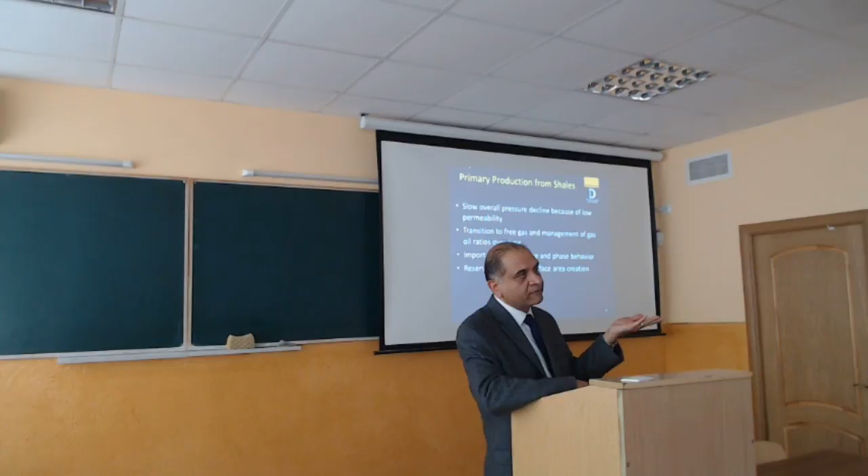So it's a slow overall pressure decline because of low permeability. And as soon as you go below the bubble point, you are transitioning to free gas, and that free gas competes basically for pore space and production. So it's important for us to understand that reservoir access and surface area creation in low permeability systems also contribute to this phenomenon.

So here is a graphic of a classic gas oil ratio plot for a conventional reservoir. What you see here is constant gas oil ratio in the first phase when the oil is above its bubble point. Once the oil goes below bubble point, free gas is generated, but your gas oil ratio goes down. That's because you have not hit your critical gas oil saturation yet. Until you hit critical gas saturation, your gas oil ratio is going to go down, and then it increases.

This increase from initial gas oil ratio to this peak can be of the order of 20 times, 10 times. So you might be starting at 1,000 SCF per STB of initial gas oil ratio, and you would hit a peak ratio of 20,000 SCF per STB. It's very common in conventional reservoirs.

Okay, so now please keep that in mind as we look at the behavior of unconventional plays. The conventional system, though, that is for a vertical well. Vertical well draining radially, right?

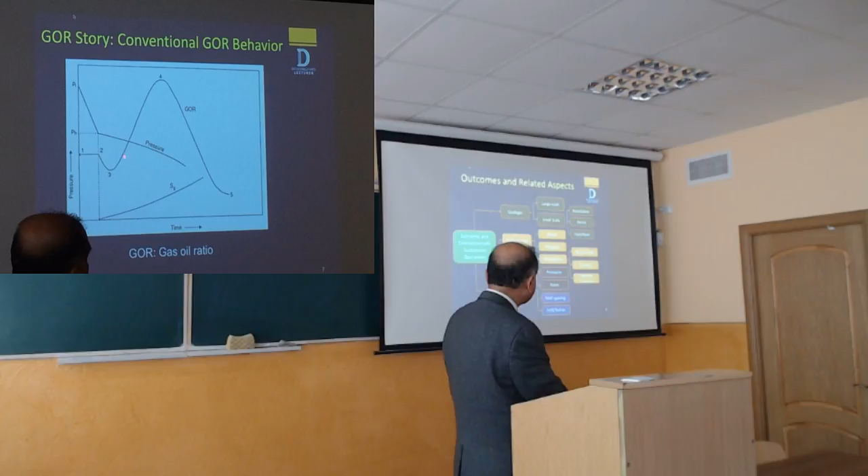And the things that are important are geologic. You have to think about completion because of horizontal wells and hydraulic fracturing. How do you operate these wells? That's an important question. And then eventually, how should a well be spaced?

Whether they should be spaced 40 acres apart, 80 acres apart, and so on - all of these considerations are important.

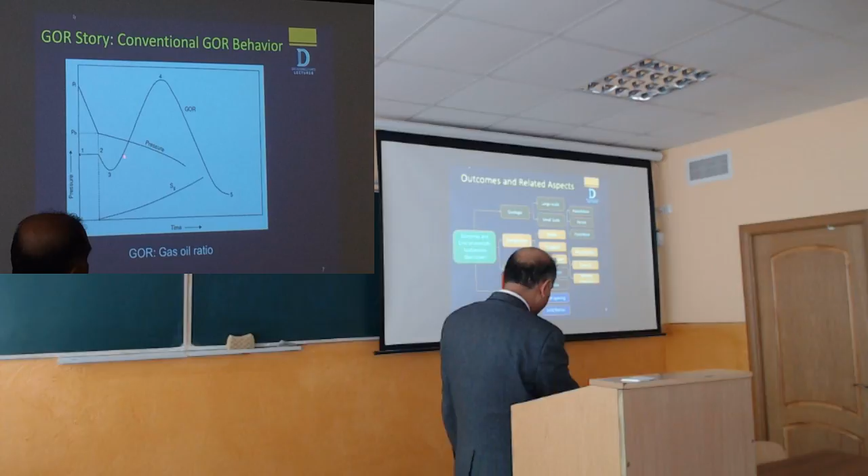Okay, so let's now look at the snapshot. Some of the hottest places are Eagle Ford and Bakken. So what we see here are cumulative oil plotted against cumulative gas oil ratio. One thing that becomes clear is that as the amount of oil each well is producing increases, the gas oil ratio decreases. So the lower the gas oil ratio, the better the well in general.

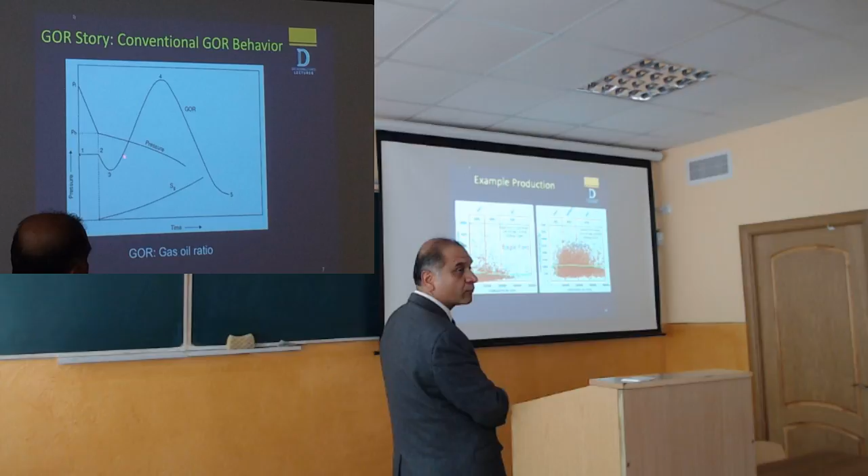Okay, there are a lot of wells that are poor wells. In fact, there are more poor wells, meaning wells producing less than 100,000 barrels of oil. Lots of wells producing less than 100,000 barrels of oil. They have very high gas oil ratios. These are very high gas oil ratios here also.

But in Bakken, there are a lot of really good wells, over 100,000 to 200,000 barrels, with gas oil ratios that are very low, only of the order of a couple thousand standard SCF per STB. So these are the two best places producing liquids in the United States.

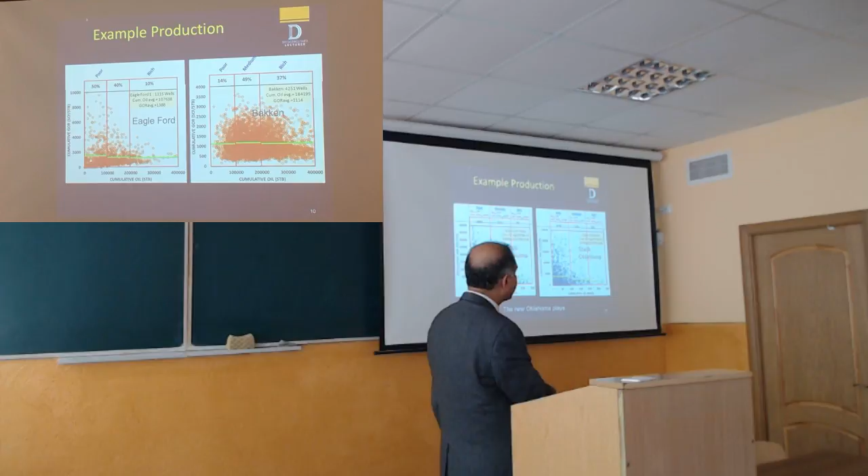Then we look at some of the really recent ones. These are brand new plays that are only 2 to 3 years old: Scoop in Oklahoma and Stack in Oklahoma. Again, producing liquids, but even within 3 to 4 years, there are quite a few wells that have produced over 200,000 barrels of oil.

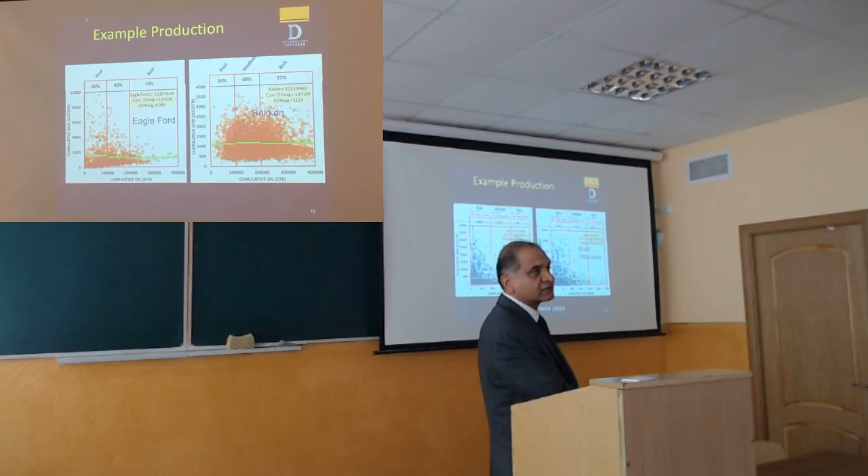So some of these newer ones, they are drilling one horizontal well, and it's not uncommon to see initial oil production of over 5,000 barrels per day. So these are coming on, but again you see the same trend - a lot of wells producing very high gas oil ratios.

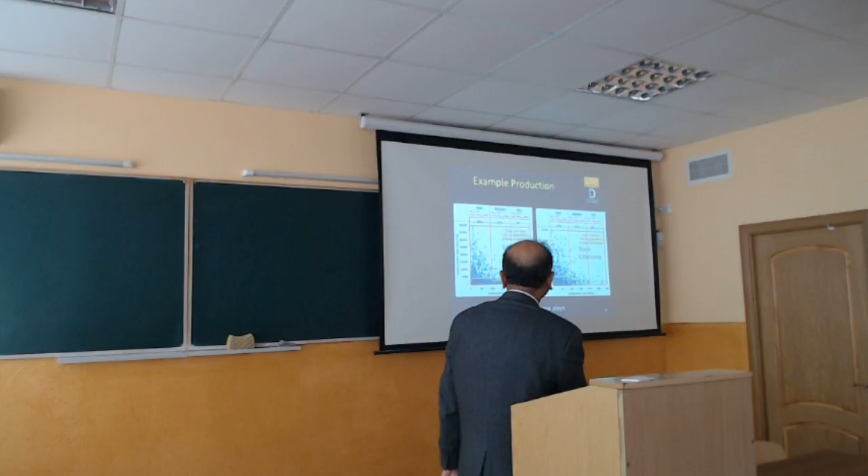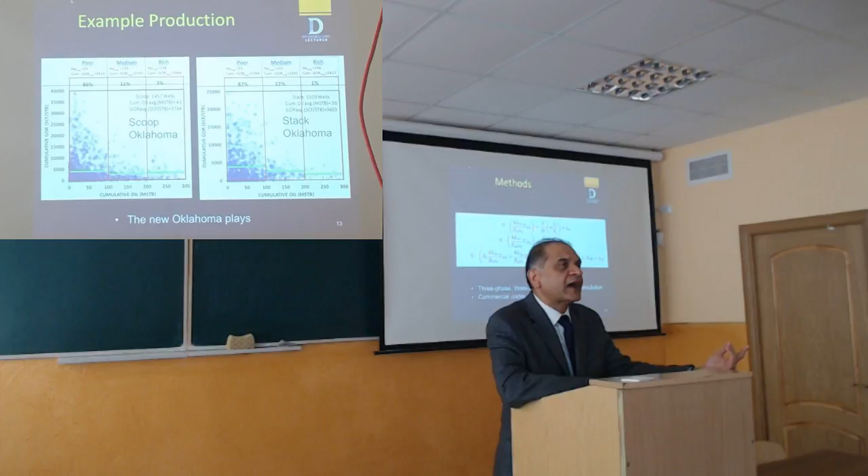Okay, so the methods we use for understanding how production works is by looking at reservoir simulation. We do a lot of reservoir simulation, either using Eclipse or, in this particular case, CMG IMEX, the black oil simulator from CMG, for looking at some of these trends.

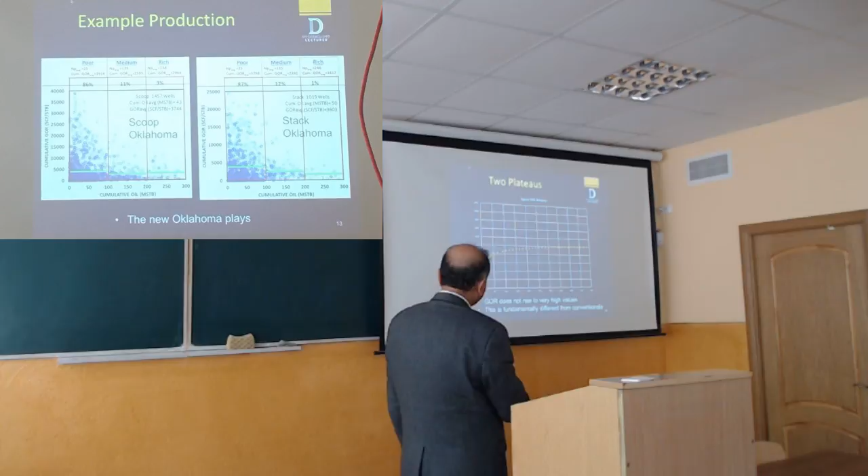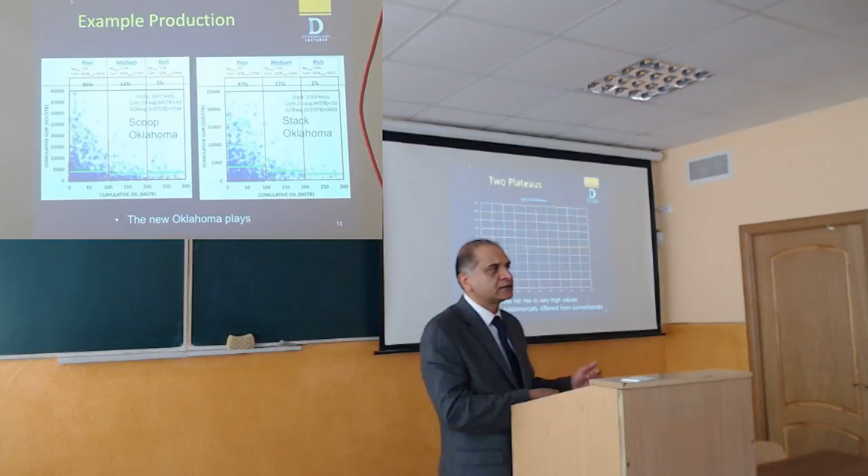So when we do that, this is for a typical unconventional well - we see two plateaus. This first plateau we call a transient plateau. Remember the system I described: it is not a radial system. It is basically a horizontal well with a fracture, hopefully a vertical fracture.

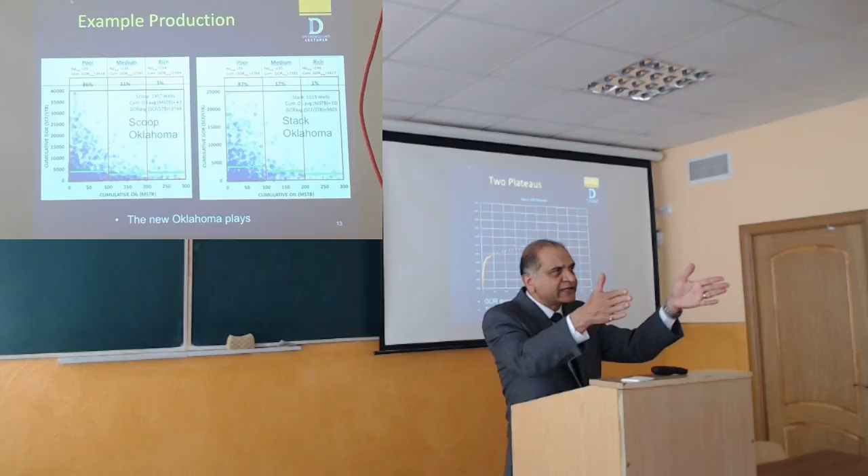So you are essentially creating these compartments, and you are draining the compartment linearly - oil is being drained linearly like this. So this particular segment we call linear flow. Then it hits a plateau when it hits the boundary of the reservoir. This boundary sometimes takes, in this particular case, only 50 days, but depending on the permeability of the reservoir, it can take up to 6 months or a year.

It can take very long because of low permeability. But then it does not show the behavior of conventional. You see another plateau which is only about 1.5 to 2 times your initial gas oil ratio. So it's very different from the conventional behavior. GOR does not rise to very high values, and this is fundamentally different from conventionals.

Okay, so that was simulation, right? That was simulation, and this is field data, from a paper by Jones. This is the paper number, and well after well after well behave like this.

You have, so you're reducing your producing bottom hole pressure like so. So why do you reduce bottom hole pressure as time increases? We do that because we have to keep the rates up, right? Because the drawdown determines the rates. So we can start high because the initial reservoir pressure is high, but then we reduce the pressure to increase rates.

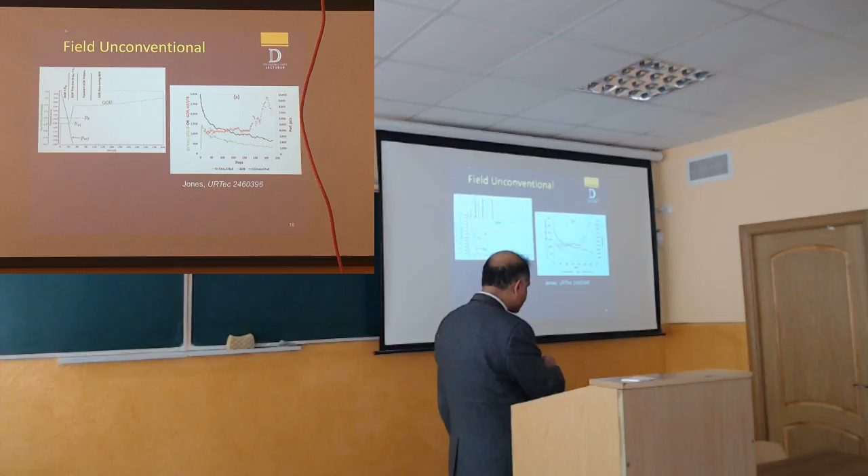So remember the system that I showed you. What is happening is that you have so much area, and you're drilling literally tens of wells in that area. You are assuming that there is no communication between these compartments. And gas is very mobile. If there is any communication, then the gas is going to move around and gather somewhere else. And supposing you drill into that section, then this is what happens. Your gas oil ratios right from the beginning can go to 20,000 SCF per STB.

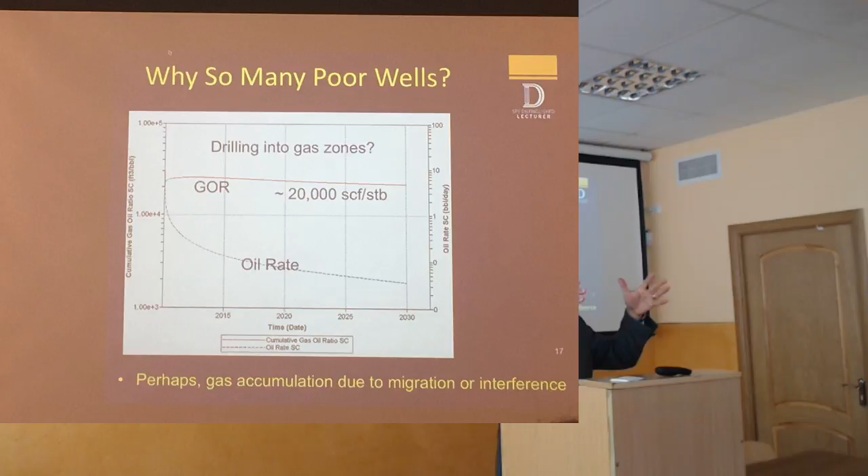So this is just a hypothesis based on all of the behavior that we are seeing. If you have some really poor wells, it could be that you might be fracturing into a gas-rich zone, and that might be giving you the high GORs and very poor well performance, because a low permeability, undersaturated reservoir is not supposed to behave that way. But a lot of wells behave this way. In fact, out of 10 wells that are drilled, 9 behave that way, and then 1 well behaves like a blockbuster well.

What happens at the last period of production? Rates rapidly go down, or not so rapidly, at the last period of production. The decline rates again depend on well to well.

In wells where you have very high gas production, the decline rates are really steep. You start off at a reasonable rate, but then within a couple months, your gas oil ratios are so high that your wells become uneconomical. So the decline rates are very high. And the wells that do really well are somehow able to sustain the rate.

There is some evidence, by the way, of communication between wells in other ways. What happens is you're fracturing one well, and then you go ahead and fracture a neighboring well. The water from that well ends up in this other well that you fractured previously. So that means there can be communication between wells that are even sometimes 1 mile apart. And if you're drilling 4 or 8 wells in a 1 mile section, then there is at least a possibility that you're creating essentially one big pool that you're drawing from.

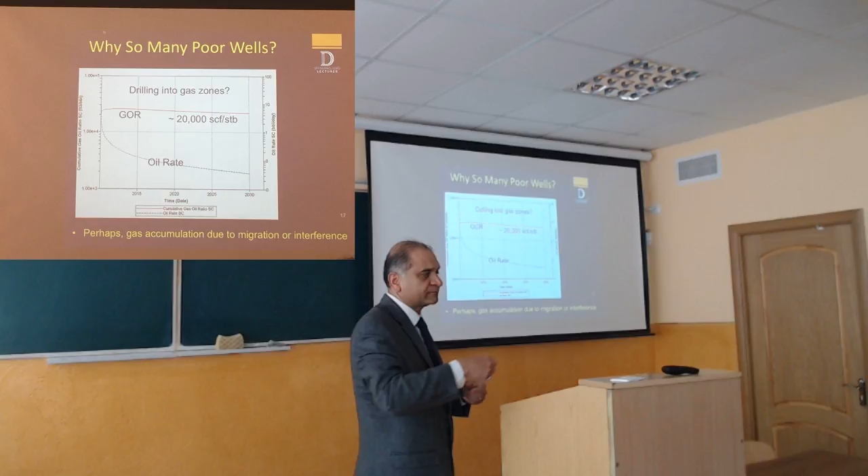So this is one story. I hope that you can take that home with you. Okay, this is one story.

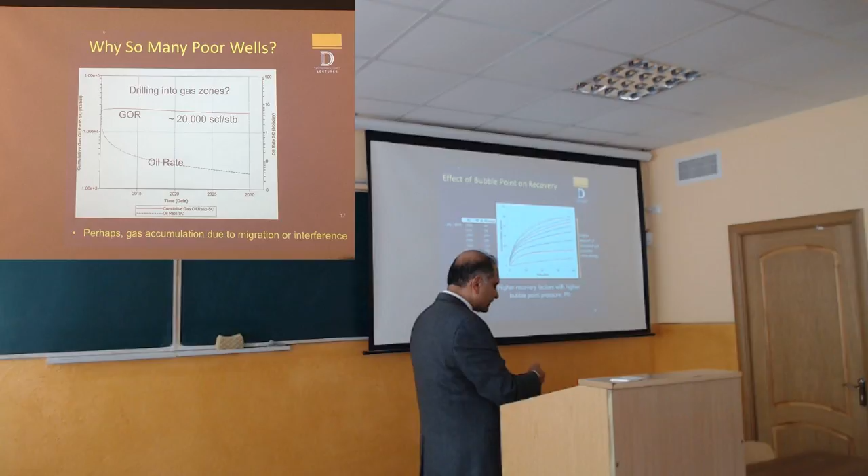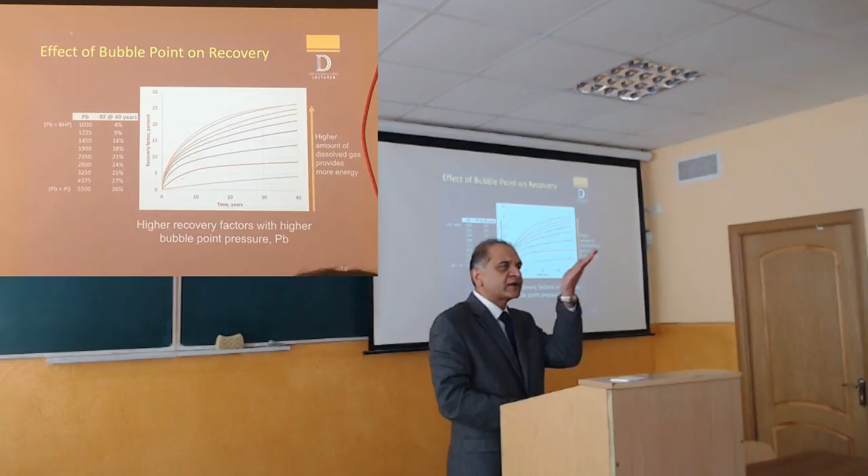So if you look at, we did a lot of sensitivities, and I'm not going to show you a lot of that information, but this is just one plot that shows the impact of bubble points. As the bubble points increase and go more towards the initial reservoir pressure, here the initial reservoir pressure is 5500 psi, your producing bottom hole pressure is 1000 psi. In general, you're increasing reservoir energy, and because this is primary production governed by initial gas oil ratios, your recovery also increases in an ideal sense. This is not field data, this is simulation.

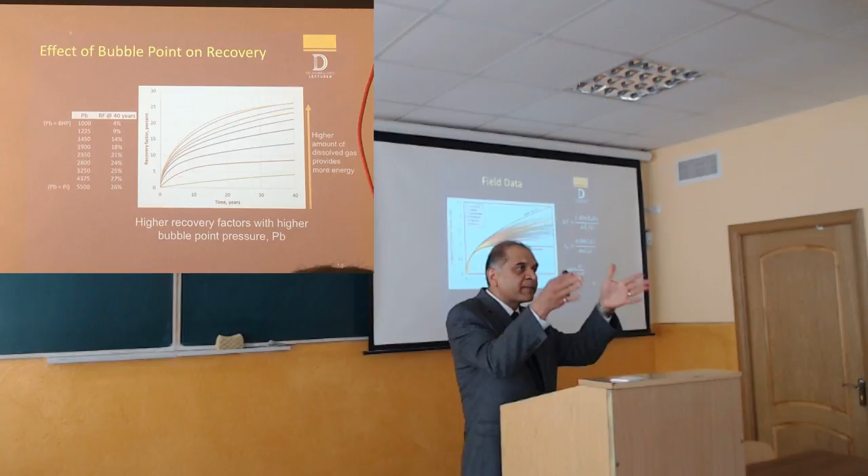But then if you take all of the wells that I showed you, all 15,000 of them, and put them on one plot, this is what you end up with. You end up with a plot that looks like a very similar fan that I showed you. It shows essentially, and this behavior we can understand by assigning basically a compartment, that a finite reservoir producing liquid would max out here, but because of the presence of gas, you have this additional increase in recovery rate. These are what we call adjusted recovery factors, the definition is given here, where you have the recovery factor. This recovery factor is a common definition for dimensionless analysis.

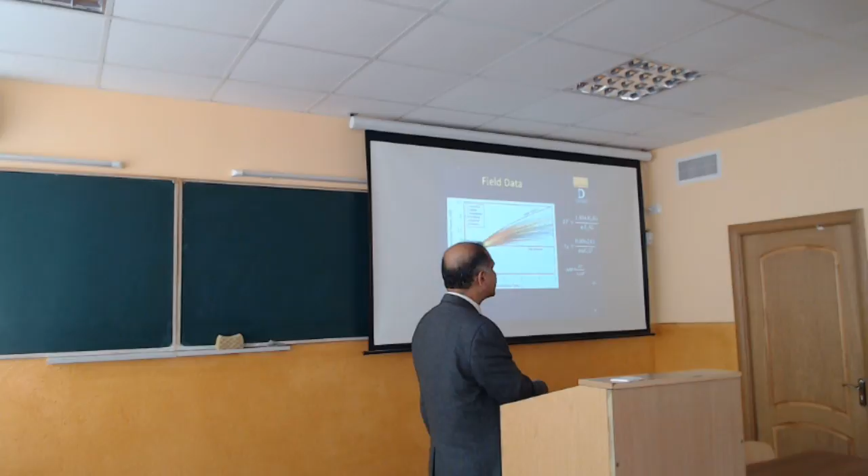This adjusted recovery factor also has drawdown in it. And we can basically show that all of the wells can be normalized by putting them on a plot like this to understand how the reservoir mechanics are working. And if you do that, we can then start looking at the various parameters that can influence production.

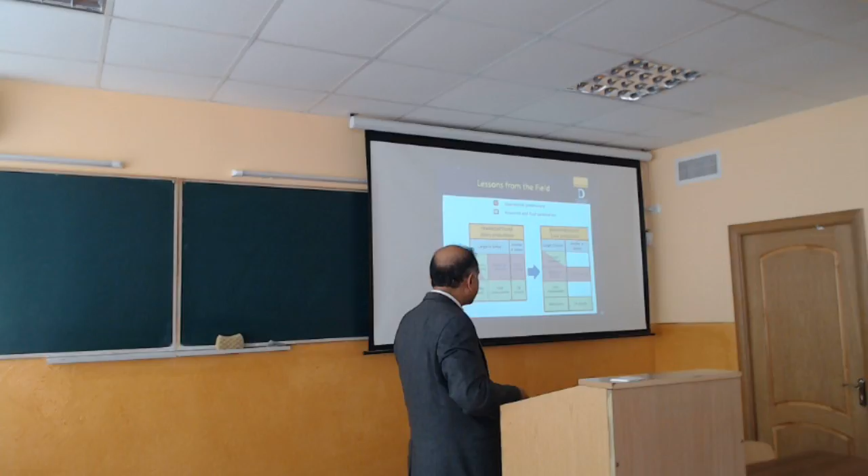So this is kind of a busy table, but you have two types of parameters here. You have operational parameters and reservoir parameters. By reservoir parameters, I mean something like permeability, viscosity, compressibility, and so on. Operational parameters are number of fractures, which you can control to a certain extent. You can control operational pressure, bottom hole pressure you can control, and fracture spacing you can control.

So basically what the plot I showed you helps us understand is that in the earlier portion of the system, where all of the wells are in linear flow, we have pressure drawdown, which is both a reservoir parameter and an operational parameter. Larger is better. Number of fractures, of course, the larger the better. Fracture spacing, smaller the better, and so on. So we can look at those types of influences. And obviously oil viscosity, the lower the better, because as more gas is dissolving in the system, the oil viscosity is lower, and that helps increase your production.

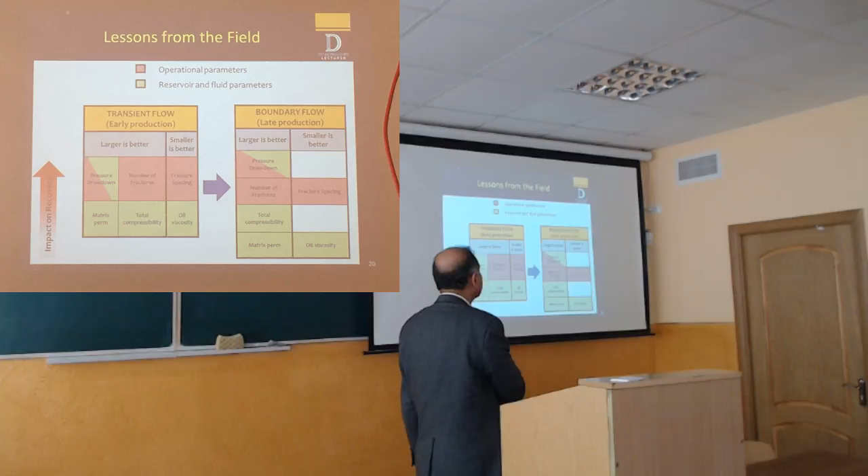And so we can do the same type of analysis for boundary flow as well. One of the things you do see here is that matrix permeability, which is the number 2 factor here, goes down in importance as you switch from transient flow to boundary flow. So some of those things become clear in that sense.

We also take a lot of these reservoir simulations and make what we call surrogate models or response surfaces that represent those reservoir simulations. So we may have, say, 1,000 reservoir simulations, and then we put them into some kind of an analytical fitted function, which we can run Monte Carlo simulations on, and we use those to figure out what parameters are of importance.

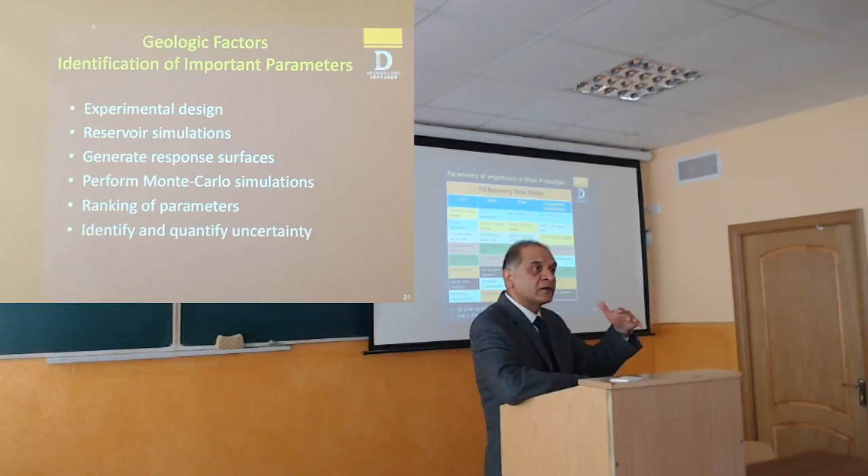And when we do that, we end up with a fairly detailed table like this. So what we see here is the importance again of those similar parameters that I showed you. We have 1 year recovery, 10-year recovery, 20-year recovery, and if you assign an economic rate of 5 barrels per day per fracture, supposing you had 100 fractures in the system, 500 barrels per day would be your minimum economic rate that would sustain. And then we look at the importance of different parameters.

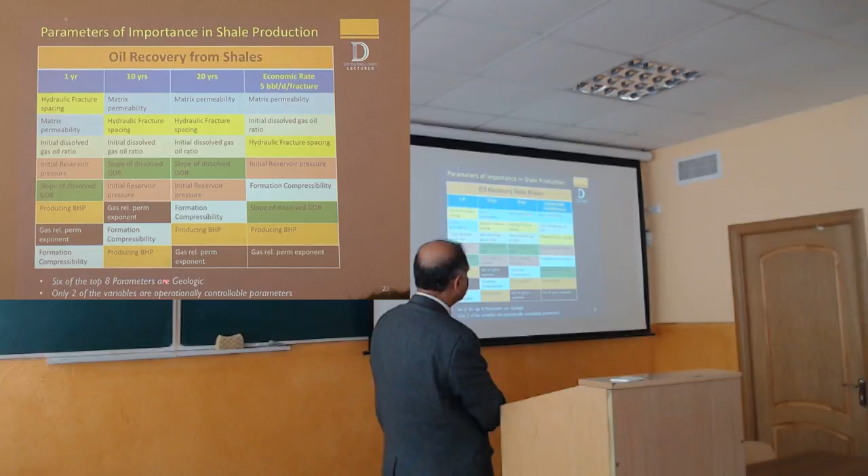It turns out that out of the 8 parameters listed here, 6 parameters are geologic, meaning things such as matrix permeability, initial pressure, compressibility, gas relative permeability exponent, things like that which you don't have much control over. The 2 parameters you do have control over are hydraulic fracture spacing and producing bottom hole pressure. So these turn out to be the operational parameters that are important in recovering more oil from these types of systems. And again, I'm going to show you the importance of those 2 things that we can control.

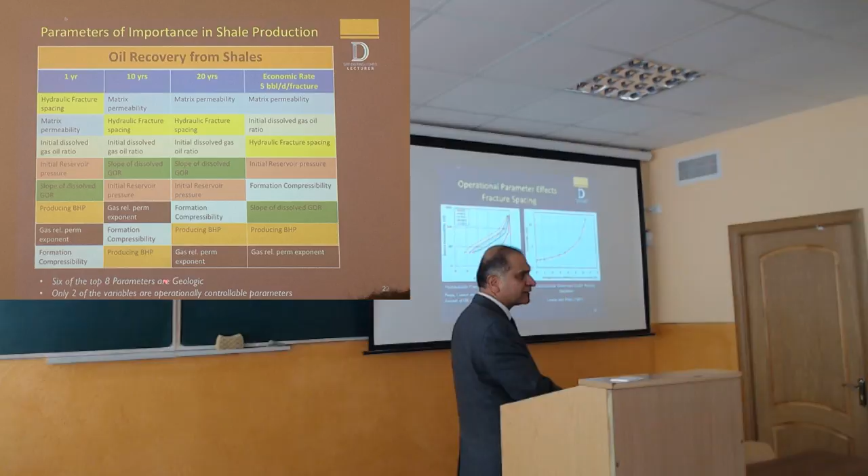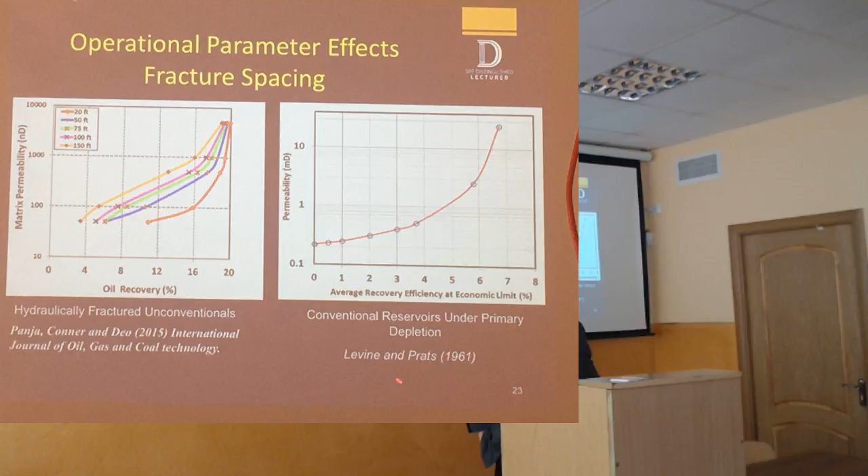From your reservoir engineering texts, you can see there's a plot here from a very old paper, Levine and Prats, 1961, a very classic paper. At that time, computers were just coming up. IBM developed some of the first computers for Exxon Mobil—at that time just Exxon. Levine and Prats used those computers to do reservoir simulation, and they developed this plot as a function of permeability versus recovery.

The recovery can go up to 8% in this case when reservoir permeability increases. This is 1 millidarcy, 10 millidarcy—this is millidarcy. And here we're looking at nanodarcy permeability, plotted similarly on a log-log, semi-log plot. So this is logarithm of permeability, but in nanodarcy.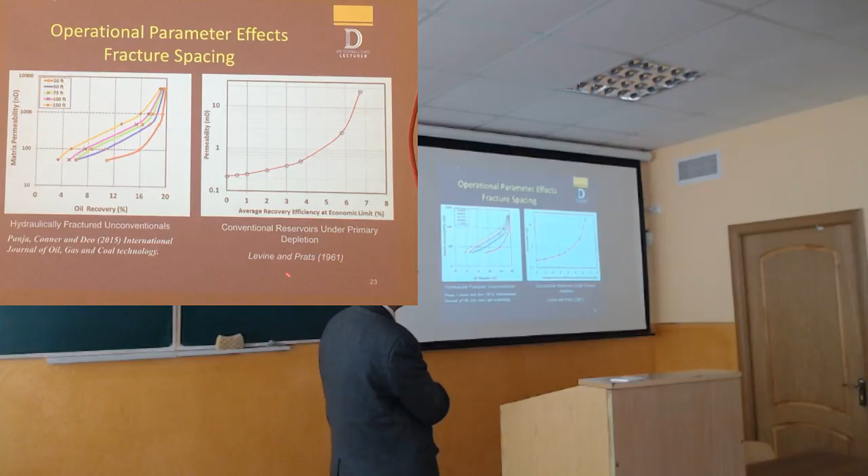As you can see, when you have really, really low permeability, let's say 100 nanodarcy, if you are at 150 foot fracture spacing, your recovery will only be about less than 5%. But if you reduce that fracture spacing to 20 foot, your recovery can quadruple—increase 4 times.

So the effect of fracture spacing when permeability is low is very clear. When you have higher permeability, it's not as clear—everything is bunched up, so you don't gain a lot by reducing your fracture spacing. That dependence is almost exponential. As your reservoir permeability increases, you don't gain much by going to shorter and shorter spacing.

So you can actually go longer. By going to shorter and shorter spacing, what do you lose? You have to pay a lot more for the fracturing job, right? So it's an economic question—how short can you get?

What was the lowest measure of permeability—the economical limit, the lowest measure? Nanodarcy, about 500 nanodarcy, 0.5 microdarcy. So the economic limit is usually somewhere around there.

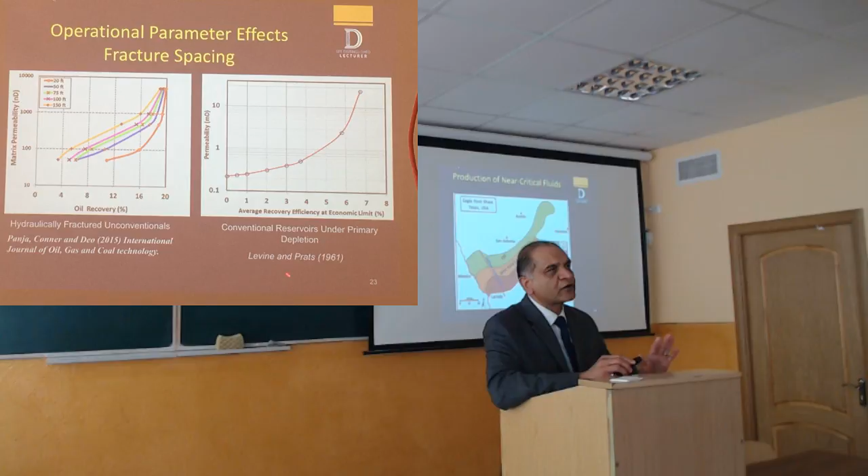So that was for black oil reservoirs, because all of that analysis was for black oil reservoirs. In some ways, black oil reservoir is an arbitrary designation—it's a convenient way for us to represent the oil. But the oil is not a black oil; it really consists of tens of thousands of components. In fact, there's a mass spec now in Florida, a very high resolution mass spec, that recently was able to identify 30,000 compounds in Arabian light crude.

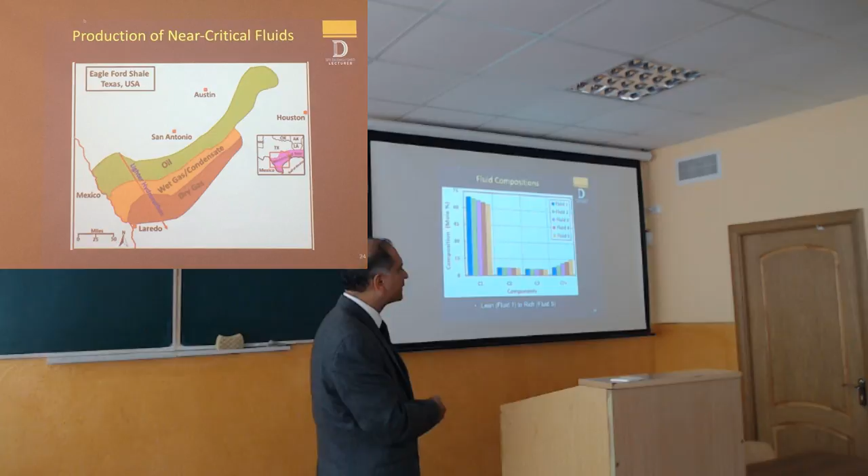In a reservoir engineering class you know how things are classified, but a C7 plus of the order of about 9 to 12% is in the condensate window. Above that you go into oil, below that you go into wet gas. That's how it works.

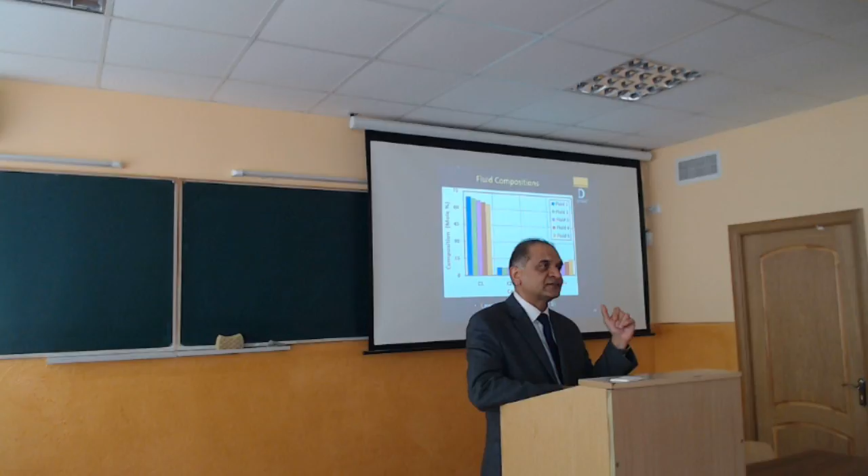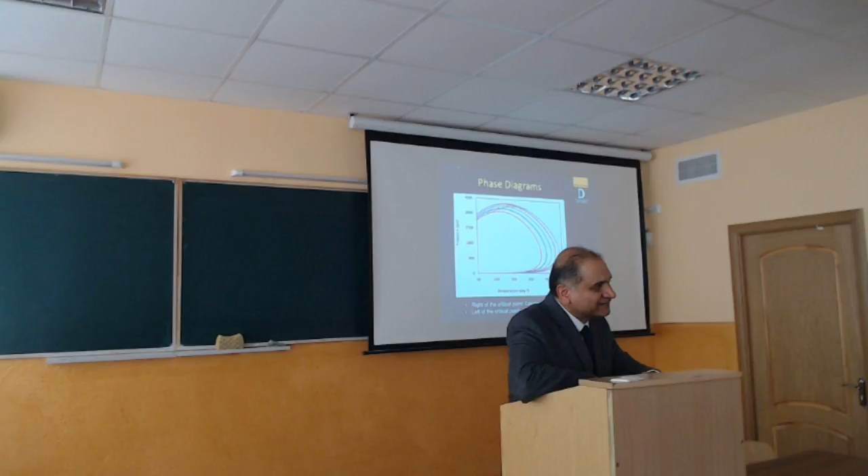And if you use C5 plus for condensate—not C7 plus, but C5 plus—yes, there could be different definitions. Anyway, it's a lumping of hydrocarbons of different types.

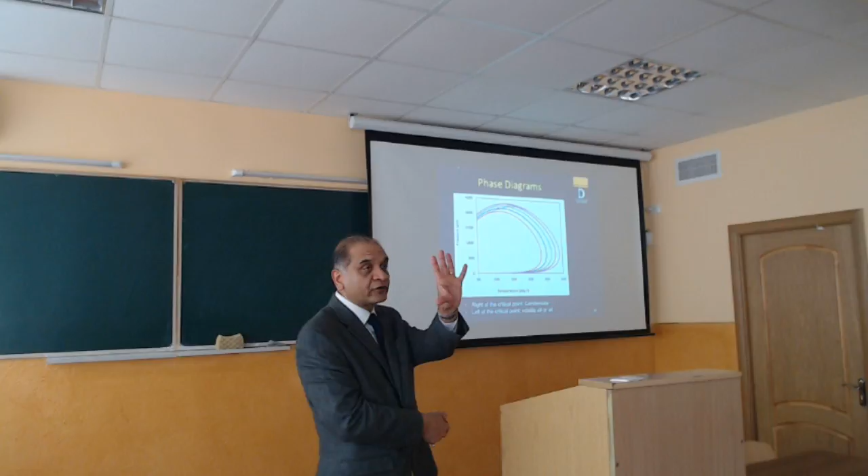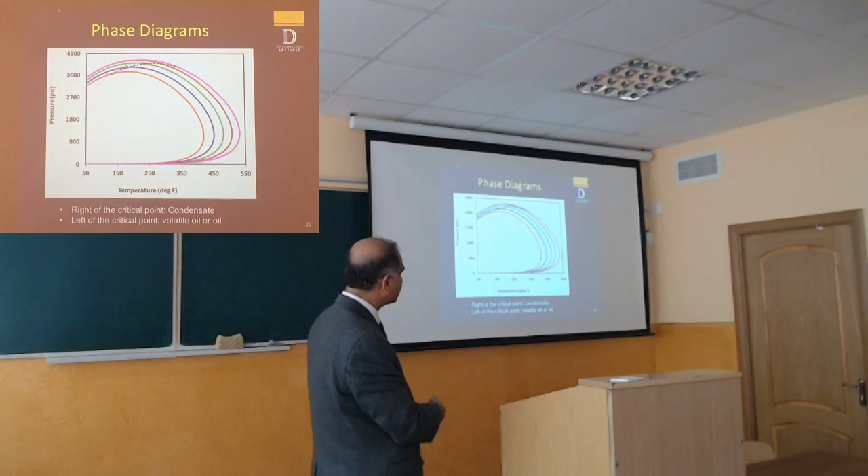So here is the phase diagram of those 5 fluids that I showed you. As the fluid becomes heavier and heavier, the phase diagram gets bigger and bigger. These are the critical points here: 1, 2, 3, 4, 5—five critical points. So where is the condensate window? Which part relative to the critical point does the condensate lie on?

So for this, let's say this pink fluid. This particular temperature, the highest temperature on the phase diagram, is called the cricondentherm. Any temperature between the critical point and cricondentherm gives you a condensate window. Supposing you are somewhere in this temperature range and you're basically depressurizing, coming down in pressure. This is the dew point curve, the critical point, bubble point curve, dew point curve.

So when you reduce your pressure, what are you going to hit? You're going to hit a dew point. So it's counterintuitive - you think that as you reduce your pressure, you're going to get gas, but instead you get a liquid. That's why they are called retrograde condensates - retrograde because they behave in a way in which they are not expected to behave.

And what these phase diagrams show is that the type of fluids that you see in Eagle Ford are very amenable to producing condensates at different temperatures, ranging from 250 to 300. Any of these temperatures can produce condensates.

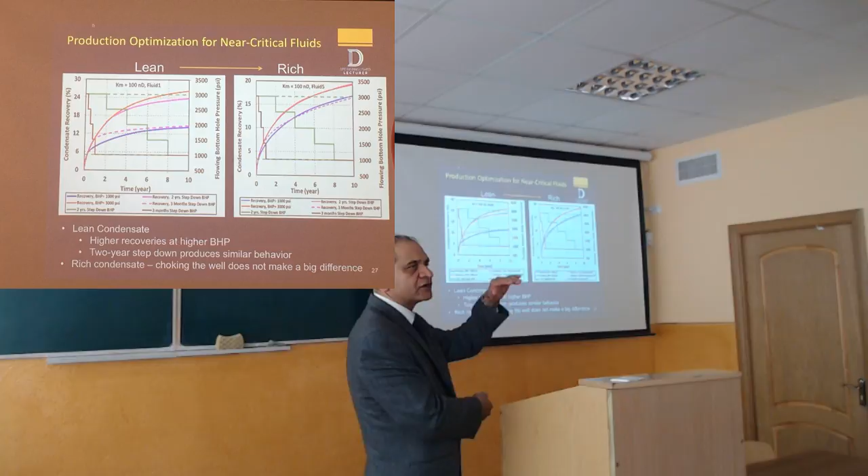So these are initially gas, but they're producing liquids because they're condensates. One thing I want to show you here is this recovery plot: when you hold the bottom hole pressure to 3000 psi, this pink or red one, versus the recovery when the bottom hole pressure is 1000 psi, you basically double your recovery by holding back pressure on your system - you're doubling your recovery from about 12% to 24% by just doing that.

And then there are other things we can do. We can gradually reduce back pressure, because you cannot hold back pressure for so long. So here is stepwise reduction of back pressure, or here there is a very quick reduction of back pressure from 3000 to 1000 psi.

And I show a couple of other recoveries to show those cases, and they are not that different. For example, this 2-year reduction basically gets you just a little bit of lower recovery, and a 2-month or 3-month reduction gets you recovery that looks more like your original 1000 psi recovery.

So basically, for these near critical fluids, as we call them, it is better to hold whatever back pressure you can on the system, because it is better not to drop the condensates off in the well so as not to lose them or block them. But for a rich fluid, it doesn't make a big difference.

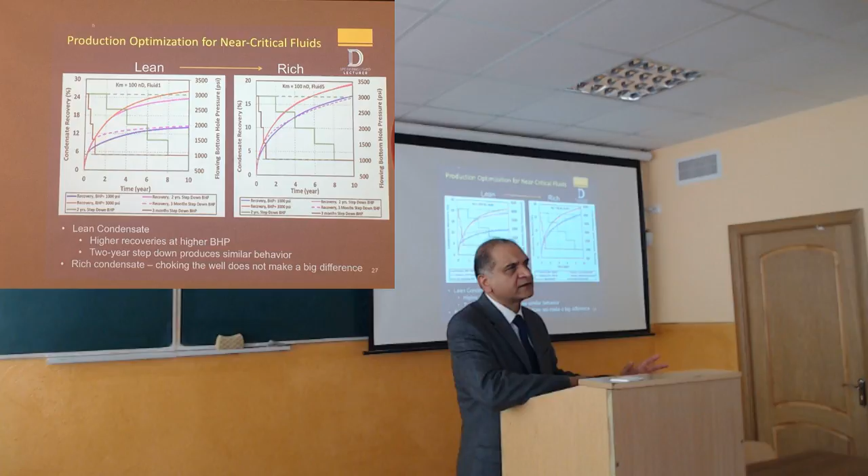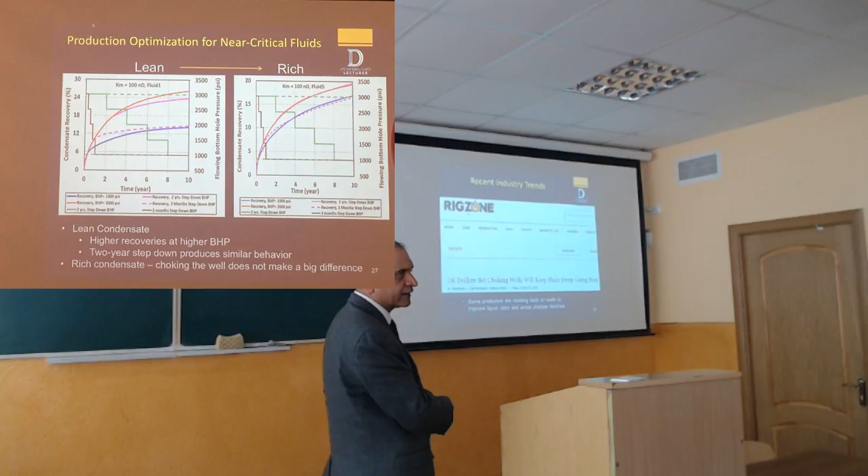Rich fluid is a little more forgiving in terms of how much back pressure you can hold on the system. So this is another take-home lesson: holding back pressure actually helps in some ways, and some producers are already doing that. Two years ago, Bloomberg showed oil drillers choking wells, meaning they hold back pressure to keep liquid rates up. This has gone into practice for condensate wells, including in a Canadian play people are talking about.

We understand that fractures are being used for generating surface area in this case, right? So the fractures have to be very effective.

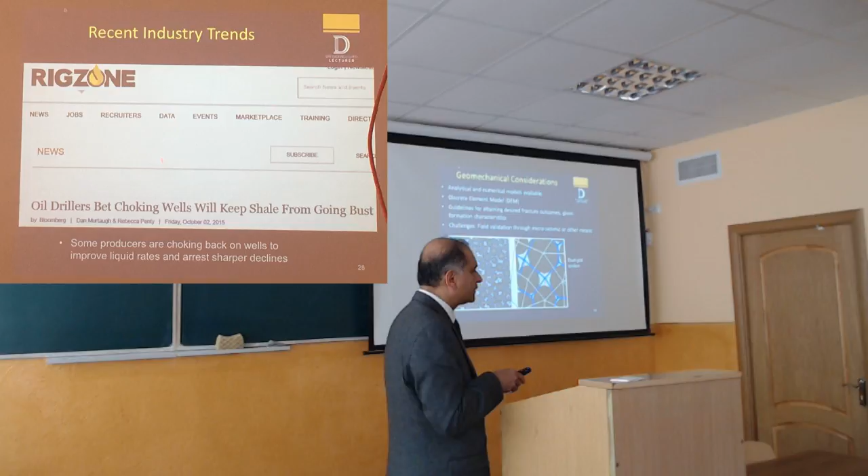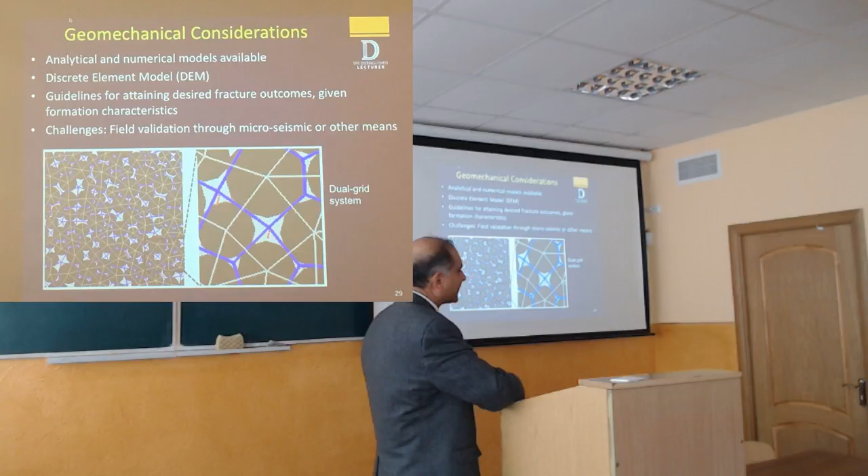We look at fracture morphologies a lot using what's called a discrete element model. We develop these models working with a national lab, Idaho National Lab. One of my PhD students helped develop this particular model. There are two grids here: one is a mechanical system grid described by particles, which can be of various sizes to assign heterogeneity to the system. Then you have a flow network that shows how fluids move into the system. There aren't many simulators that can do this type of simulation with mechanical and fluid representation at the same time.

Using that, we can actually model these multiple staged horizontal wells. I'll show you a couple of examples.

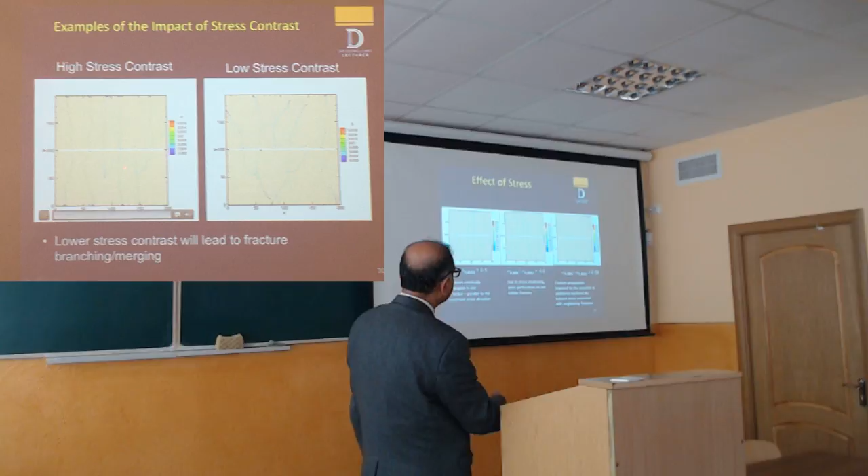This can be quantified, which is somewhat intuitive, and you can do that using GOHFER or something similar. But in GOHFER you can only do planar fractures, whereas these are non-planar, meandering fractures that honor the heterogeneity of your rock. Fractures propagate parallel to the maximum stress; when the stress is lower, they start intersecting and create a more complex fracture network.

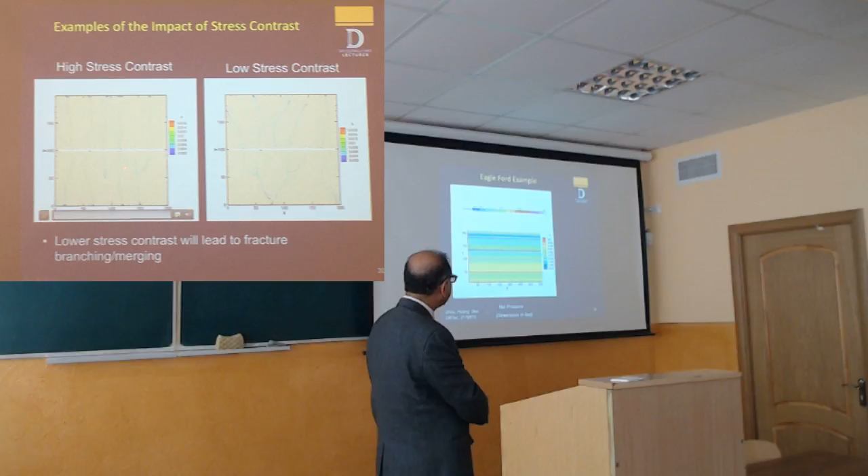We used that kind of program to represent full-scale heterogeneity in a system in Eagle Ford. This is a 24-layer model with about 300,000 particles. It was published in an SPE paper, URTeC 2170875, which you can find on OnePetro if you have a subscription.

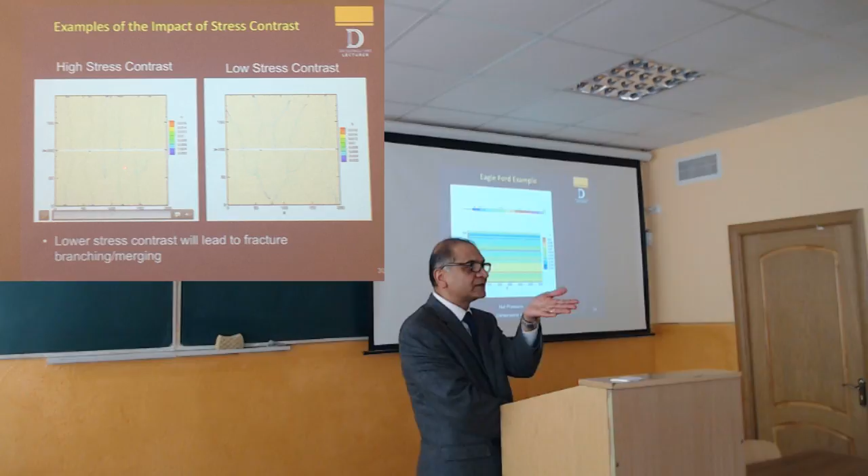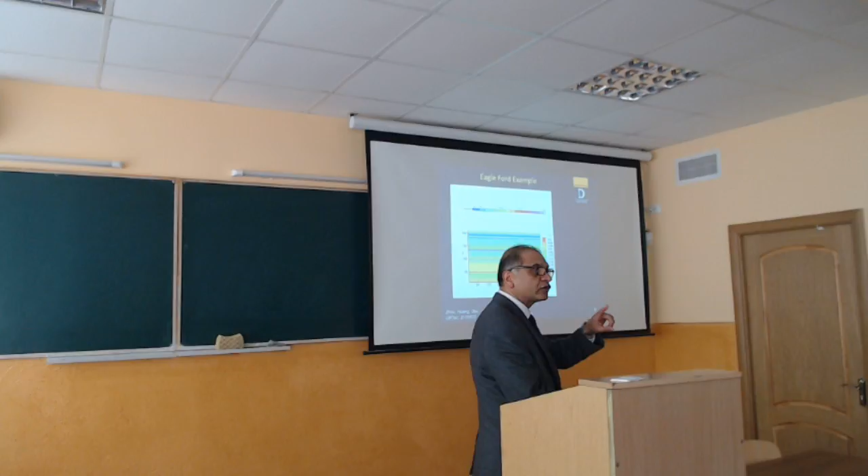The company asked us to figure out if it's better to place the well at the top or bottom of the Eagle Ford. I'm going to show a simulation only for the bottom. This simulation takes a couple of days to run because it's quite involved, with full heterogeneities in the system.

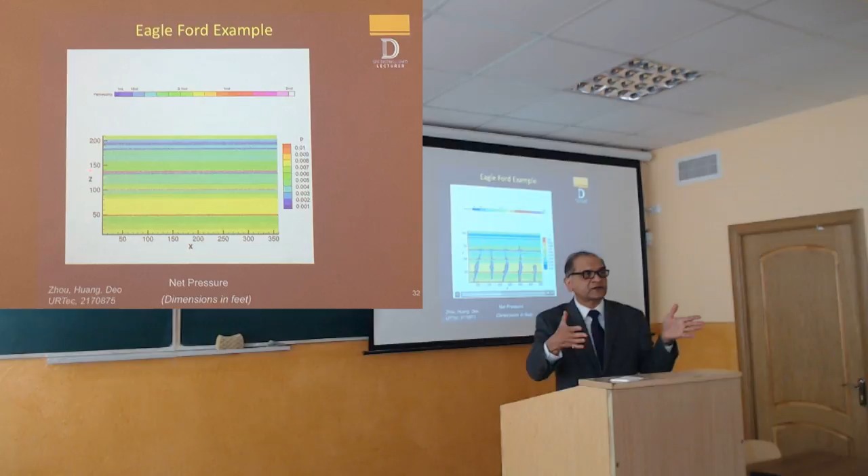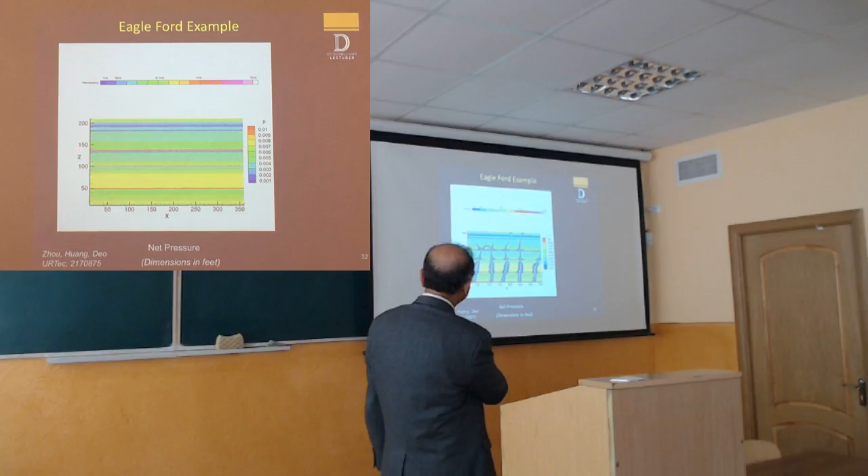Each of these layers has its own mechanical properties, its own permeability, and its own porosity. So it's a complex system, and what you're seeing is net pressure in the system. You can start seeing fluid leak off along the edges of the layers, and each of these is different. As it comes to a high permeability system, it loses fluid and loses energy, and as a result the fracture can either turn over or basically die. This captures all of that.

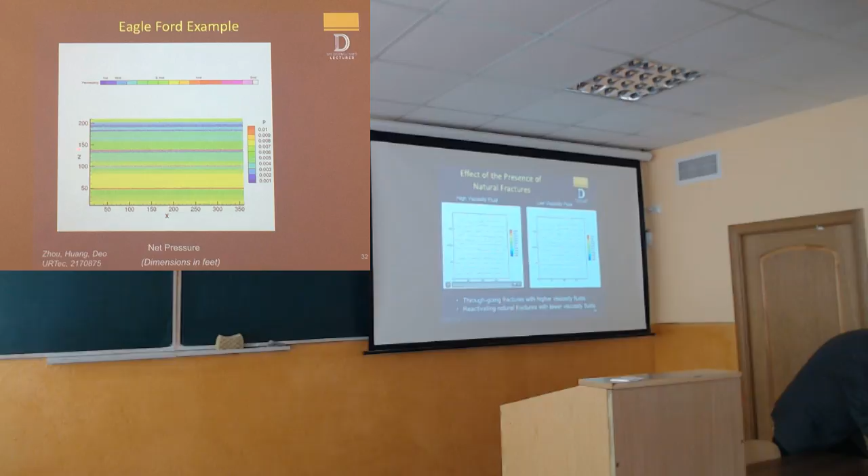This type of capability lets you understand how to effectively create the type of fractures you want to create. You can then look at the effect of natural fractures—so now we have hydraulic fracturing in a natural fracture environment.

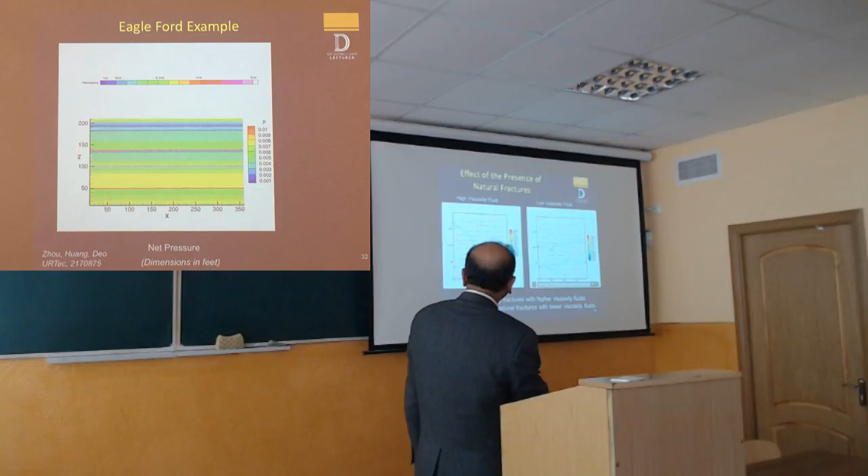So what we are seeing is a high viscosity fluid that basically goes through the fractures more or less, it's not opening up fractures, whereas a lower viscosity fluid is reactivating the fractures. It reactivates this fracture, that fracture, and creates a more dendritic, complex fracture network, whereas this fracture is a straighter fracture.

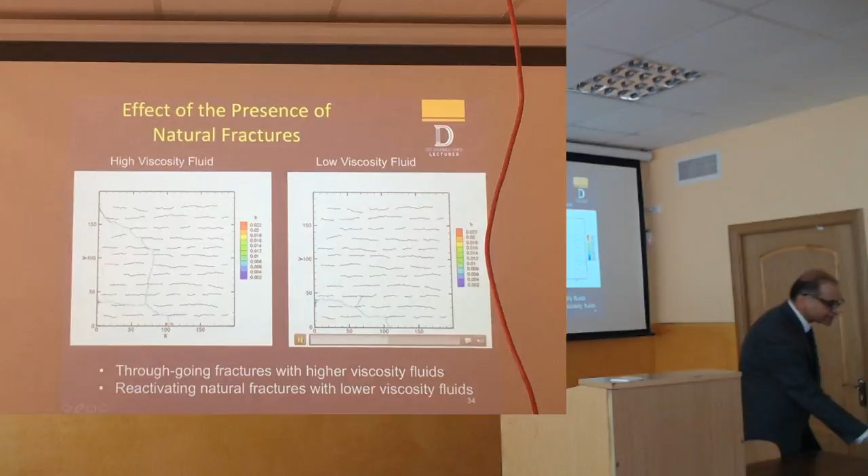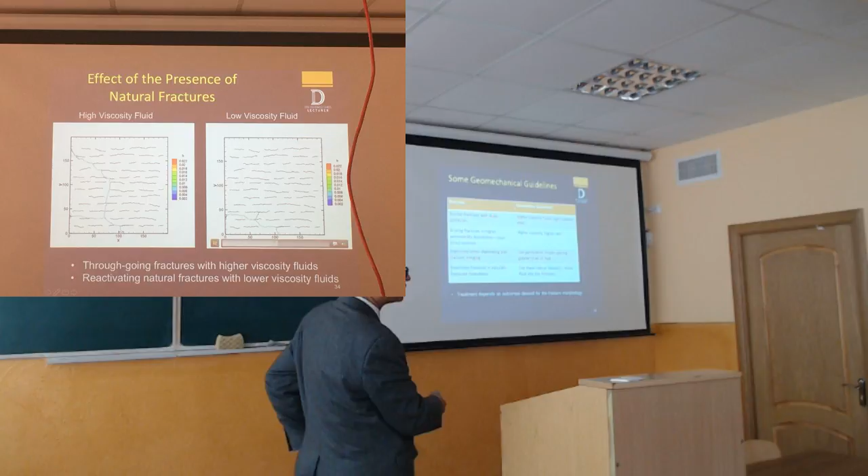So we can use these type of things to create some set of rules. I'm not putting all the rules down, but basically shorter fractures with large apertures can be created by using high viscosity fluids. And depending on your geologic environment, you can decide what is the best way for your well, what type of production strategy you want to have.

Building fractures in high permeability formations and clear stress contrast, again you have high viscosity, higher rate, and so on. So the stress shadowing is where you have two fractures growing, and because they are growing, it creates higher stress in the interior region. So anything that's in the intermediate region is going to have difficulty growing. That's called the stress shadow effect.

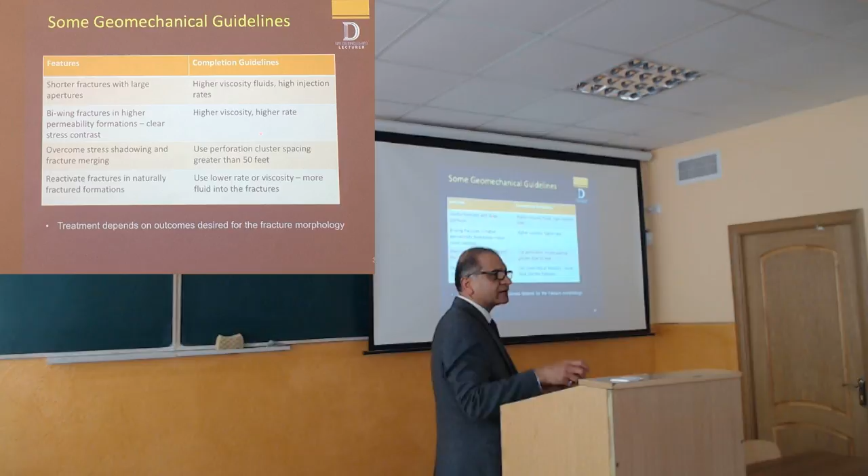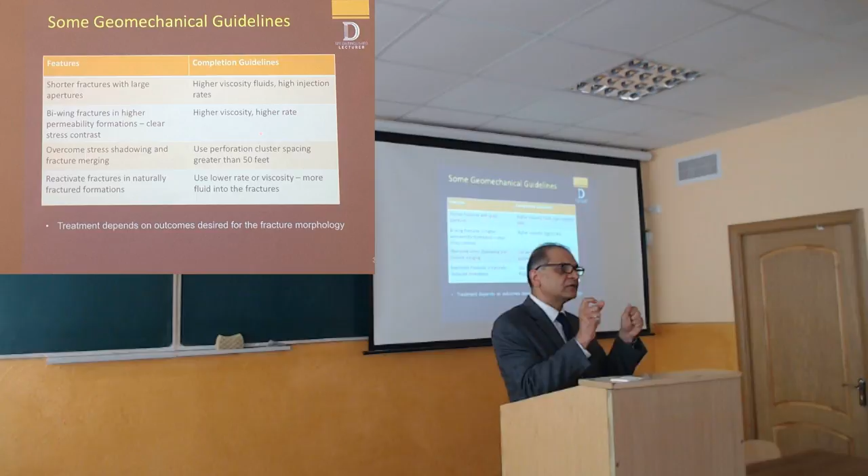But you can overcome that by spacing the fractures a little bit. So this is the geomechanical effect that can constrain you in how short you can go in terms of fracture spacing. You may want to try to go to 20-foot fracture spacing, but if you try to do that, you might have the stress shadowing effect. You can understand that by performing simulations of this kind.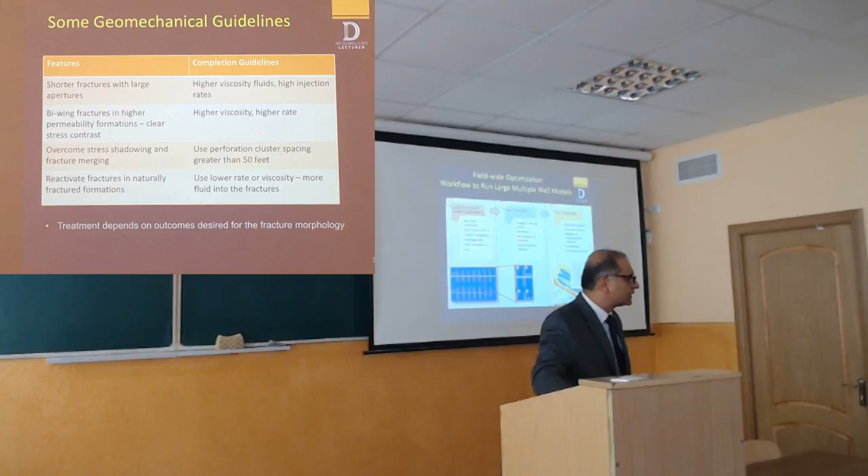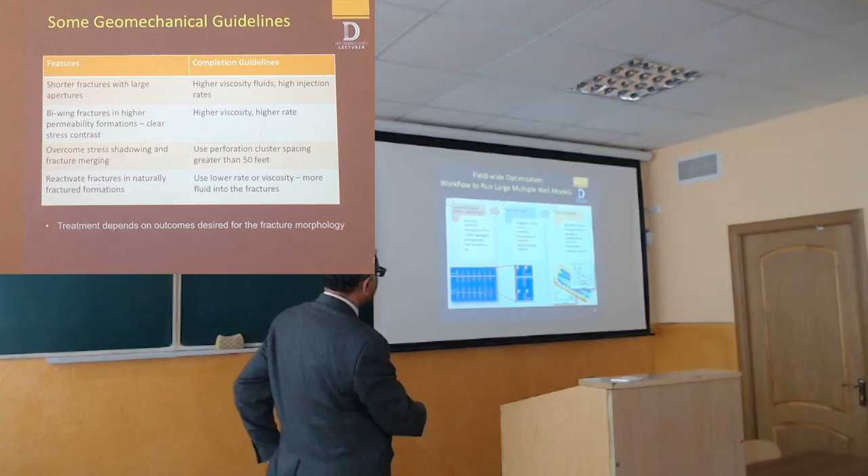All right, then finally we can start taking all that information, the fracture information, different types of, so this is well number 1 that has various fractures, well number 2 that has various fractures. Then you may have multiple wells in the system.

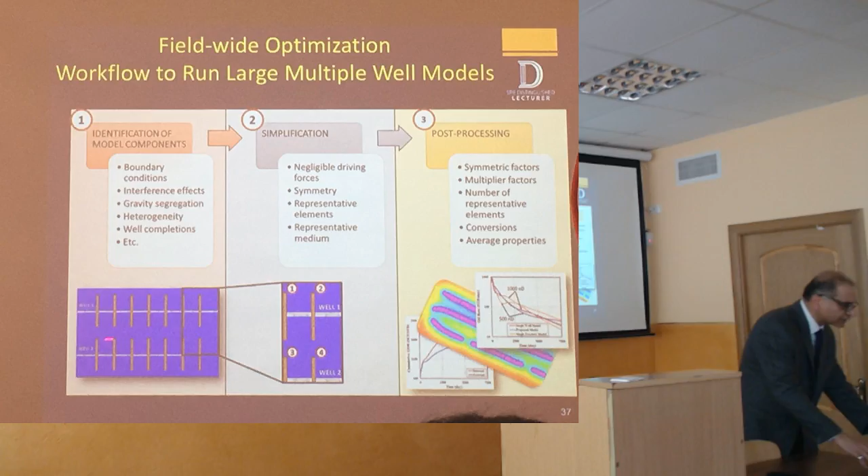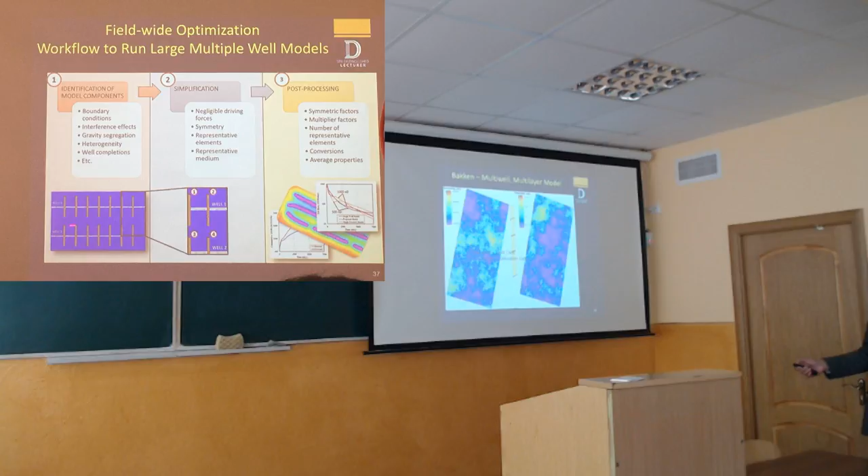So we basically have created a workflow to take these complex fractures, multiple wells, into one simplified system, and we showed this in a Bakken network, a Bakken system where you had 3 wells, well 1, well 2, well 3. This is all in one section, 3 wells, and they were highly heterogeneous, as you can see. The permeability field varying from about 0.7 millidarcy to 0.29 millidarcy or something. It's a layered model with a highly heterogeneous system.

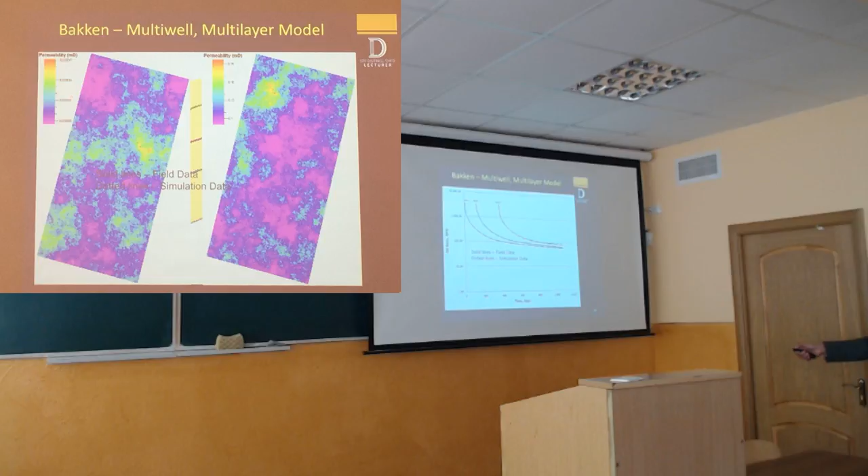So you can use that information, and we were able to use the type of morphology of the fractures I showed you and well representation to match the oil rates reasonably well. So you asked about decline rates, you can now see the decline rates here, starting around 5,000 barrels per day, and then in about 2-3 years, it gets down to 100 barrels per day for one of the wells, or more or less all 3 wells behave the same way.

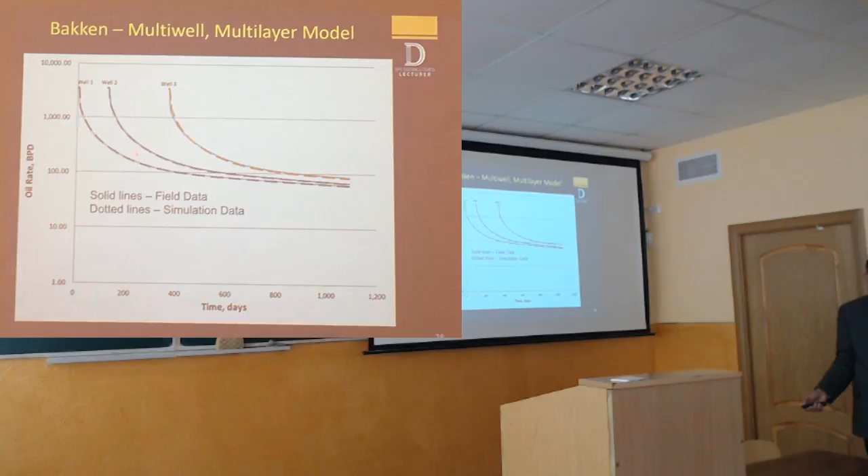We were able to match this using that workflow that I showed you, and you can take that type of information and put it into some kind of an economic analysis to see how many wells can you have for a given fracture spacing.

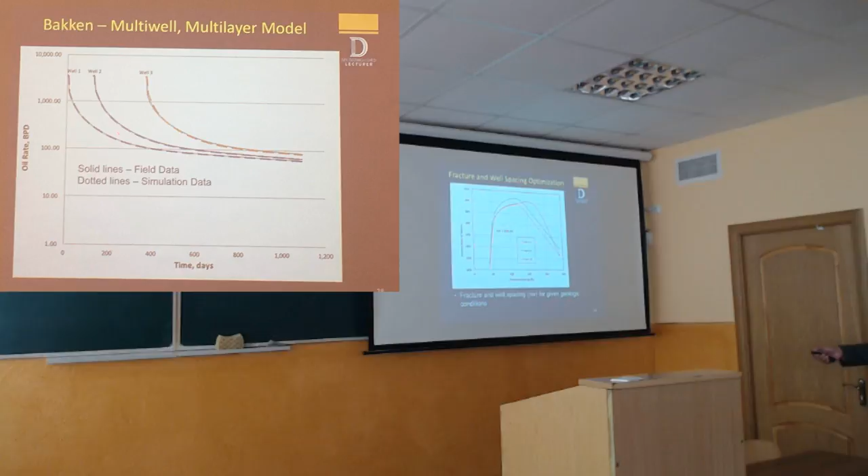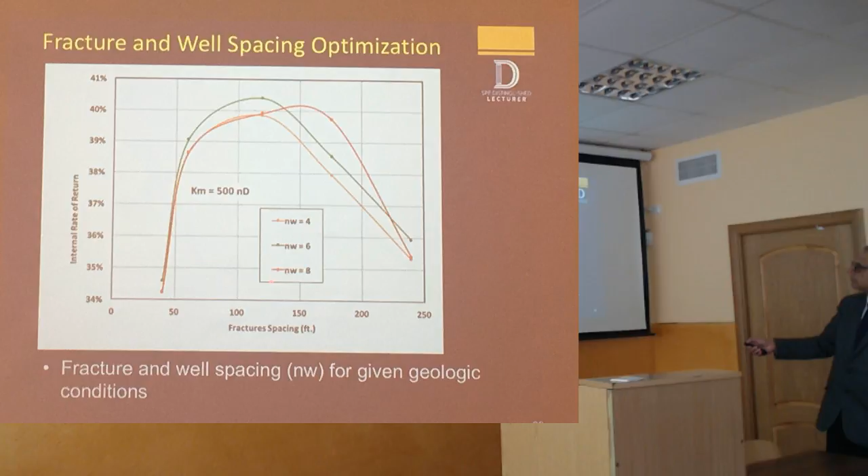So obviously, if you have 8 wells, your fracture spacing has to be larger, and as you go to a smaller number of wells, 4 wells, you can get away with shorter fracture spacing. So your internal rate of return then determines how many wells and what kind of fracture spacing you have. You can use that type of workflow to create an economic model for producing these type of systems.

So basically then, in conclusion, I gave you that importance of gas-oil ratio. The gas-oil signatures for low permeability, hydraulically fractured reservoirs are different from conventional reservoirs and provide an understanding of production. Matrix permeability and fracture spacing are two of the most important factors that determine fluid recoveries. Improving recoveries for condensates, these near critical fluids.

You have to have an integrated understanding of reservoir and operational parameters. Holding higher producing bottom hole pressures leads to higher recoveries, often higher liquid rates for near critical fluids. It's possible to represent most liquid data in North America on that single curve that I showed you.

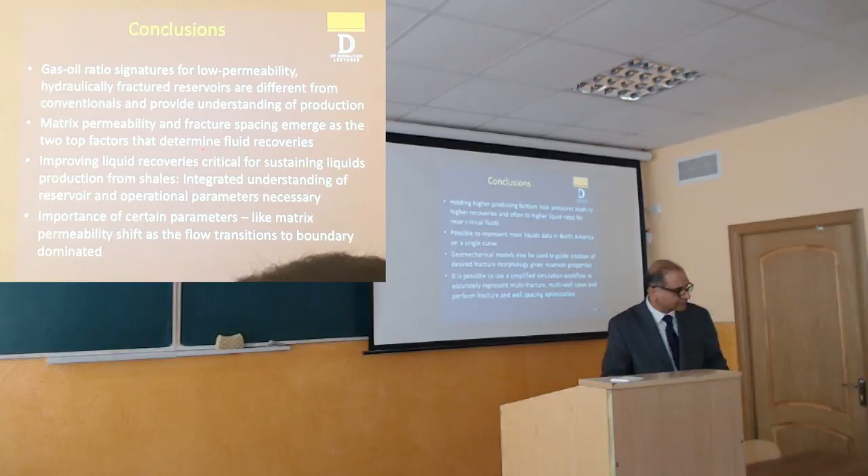And then geomechanical models may be used to guide creation of desired fracture morphology. And then finally, you can integrate all of this into a framework that will give you how many wells you can have for a given fracture spacing and vice versa. So basically that, I think, concludes my talk.

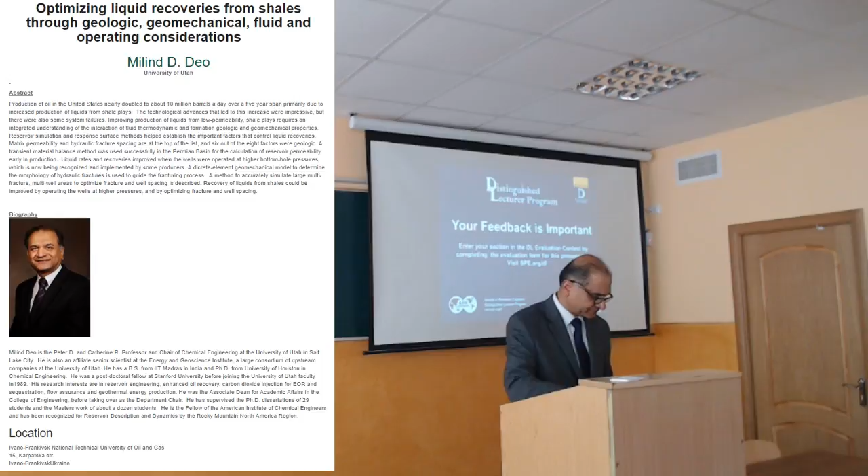Happy to answer questions. You told that you use CMG for your simulation - why is it better rather than Eclipse compositional or black oil model? Depends on your tasks.

Is it on record or off record? It's still on. You want me to make it off?

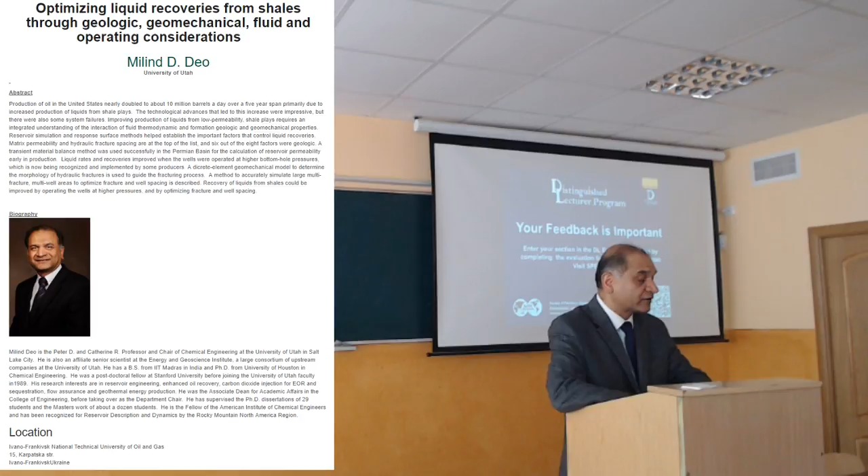I think they are completely equivalent. CMG, especially for students, I think is a little bit easier to use. But Eclipse is also integrated with more geologic packages. Of course, now there are rescue formats that you can bring Eclipse into CMG or CMG into Eclipse. That's possible. But just if you start off with something, the learning curve is a little less steep for GEM, particularly for compositional simulation. And it's very robust - meaning it's very forgiving in some ways.

What software was used to perform the simulations? I showed various packages. The black oil simulations, the last ones that I showed, were done in Eclipse. The ones before that were done in Computer Modeling Group, CMG. The black oil simulator there is called IMEX, and the compositional simulator is called GEM.

So GEM is equivalent to Eclipse 300. It's a compositional simulator. And for condensate, you must use a compositional simulator, of course.

Phase diagram - you explained everything. I'd like to ask you about dropped condensate. How can we produce more condensate? What do you recommend, like in USA technology, maybe better methods to enhance dropped condensate recovery?